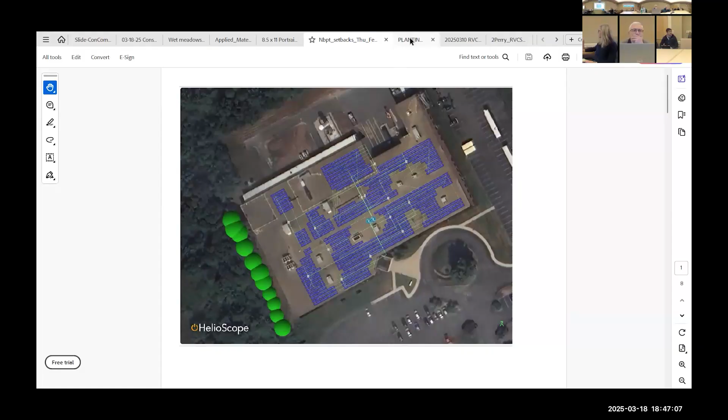Okay, so this is for Stanley Tucker Drive, correct. Then we've got this plan showing the row of trees at the west end of the structure, correct. This is the existing... are these solar panels on the roof? That's our plan, to put solar panels on the roof. Got it, and I've got your planting plan. That's awfully old, from when the building was first built.

So, do you want to walk the commission through what we've got here, or do you need a link to the Zoom so you can share? I think a link would be better. So if you go to the city's website... I'm trying to get there now, I don't know why I can't access it, but cityofnewburyport.com. Okay, I'm there.

Go down to find the city calendar. Conservation Commission calendar, okay, the 18th. Yep, and on our agenda, there should be a Zoom link at the top. So here's our agenda, you can see we're here. It looks different on my homepage. Is it this link right here? It's probably that one. Okay, sorry, it looks different. Okay, I'll go down to... right there. Oh, thank you so much, appreciate that. Now I'll be able to share it from my hard drive.

Let me know when you're ready, I'll stop sharing. Thank you, I'm sorry for the slowness. No worries, I'm usually the one having technical difficulties here.

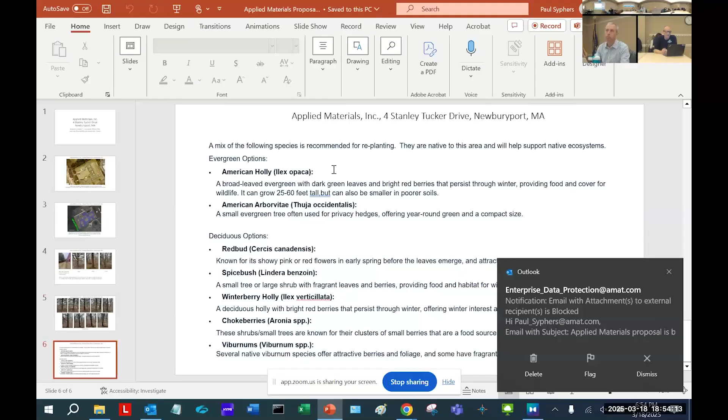For replanting, a mix of species is recommended, native to this area to help support native ecosystems. I have a couple of evergreen options and I really like the deciduous options too. I think I'll mix them up if the board approves. I really like the berries for animals and birds to use those trees as well. That's the end of my presentation.

Could you—I can't really read what they are, if you could read them.

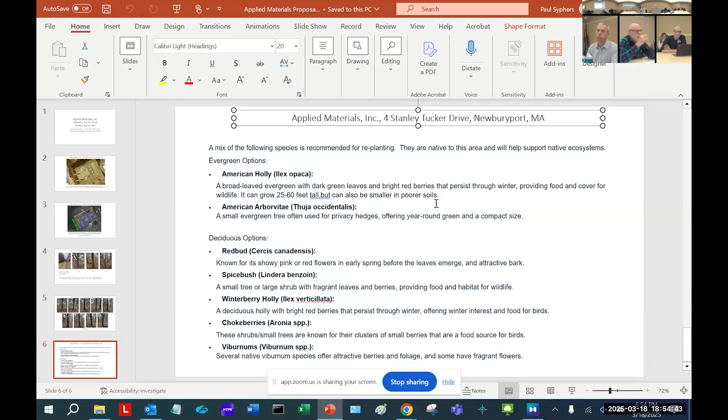Sure, from the top down: evergreen options are American holly, a broadleaf evergreen with dark green leaves and bright red berries, sometimes growing 25 to 60 feet tall—an issue, but if planted on the more northerly edge they won't interfere with solar gain. American arborvitae is a smaller evergreen. For deciduous, there are some good ones with berries for wildlife: redbud, spicebush, winterberry holly, chokeberries, and viburnums.

Sounds good. Any questions?

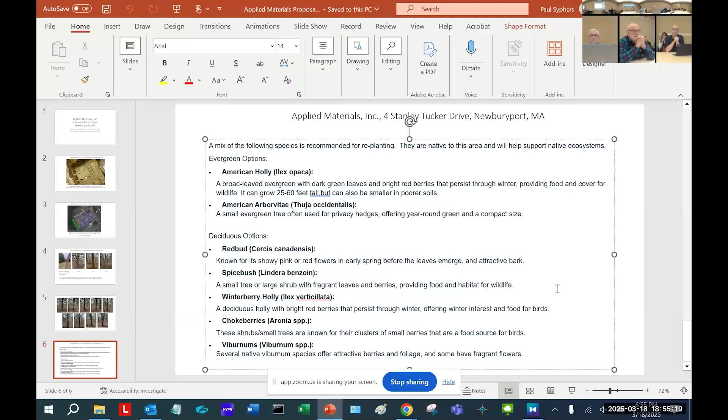How many of those—just one for one, or? One for one, it'll be 12. I'd like to mix them up if you approve—choose one of each and maybe a few of a couple, since I have to put in 12 and there are 7 species, so maybe 2 of each. They're smaller, so I could replace 12 with 14, I wouldn't mind doing that.

No, you can put as many as you want, we're not going to argue about anything. As a matter of fact, at the Gloucester facility where I also work, I'm looking to replace a lot of lawn and sod with wildflowers, so we're in the middle of doing that as well. I'm also on the Varian Green team, so we're very much interested in water and energy conservation.

So the arborvitae is kind of a tall, spindly thing. Yeah, the only reason I put it on there is because it's evergreen and one of the two that are native, and it's a good place for animals and birds to hide. But it's not going to be a wall of arborvitae.

That looks to me not natural enough. Yeah, and as you see, we're right next to a wild stream or brook, so I want to make it look natural over there, close right there.

So you'd be planting these in the same location where you're taking out the trees? Yeah, right within that 35 feet—most are basically 33 to 35 feet, a straight line of pines. I don't know if they were planted or were volunteers. The trees behind them toward the creek are much smaller, mostly blueberry bushes and that type of thing. Since I'm removing trees, I can put in trees.

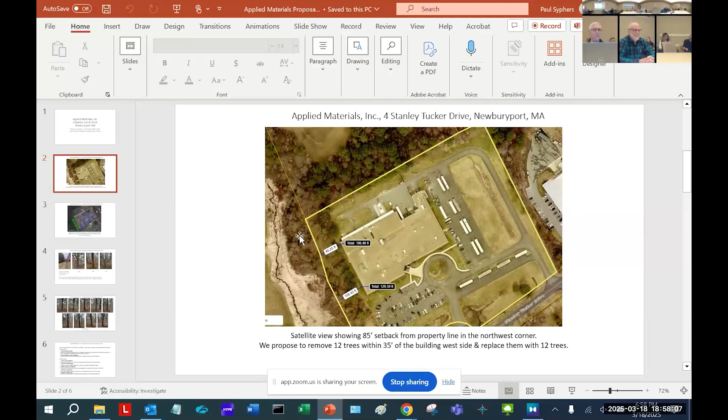Alright, are we good? Maybe 2 or 3. Do we have any conditions for this? Not really, unless you want to specify a certain number to make sure that number gets planted, or specify anything about location or timing of monitoring. We can make it at least 1 to 1, at least 12. The more the better. Knock yourself out, more berries for the birds, the better.

If we're -2, no, the -3 has a condition. Do you want them to be monitored for survival and replaced if they don't survive? Yeah, maybe 3.

And I didn't mention this one beautiful cedar tree at the north end that's within the 35-foot zone, but it's so healthy and so beautiful and it's not going to get in the way of the shade, so I decided to leave that one. Good.

I'll make a motion for a -3 determination, with the condition being we'll monitor it for 2 years to make sure the plants survive. Sure, and if they die, I'll replant.

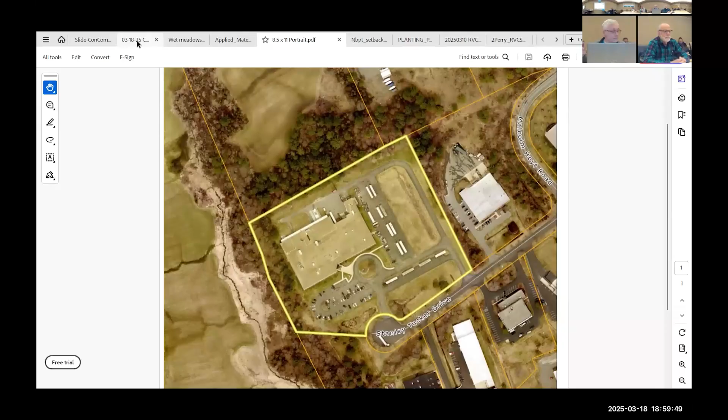Should I hang around or am I free to go? You're all free to go if you want. I'll send you this determination, you'll be able to access it through OpenGov, and I can send you a copy in the mail also if you'd like. Thank you so much, appreciate your efforts, thank you.

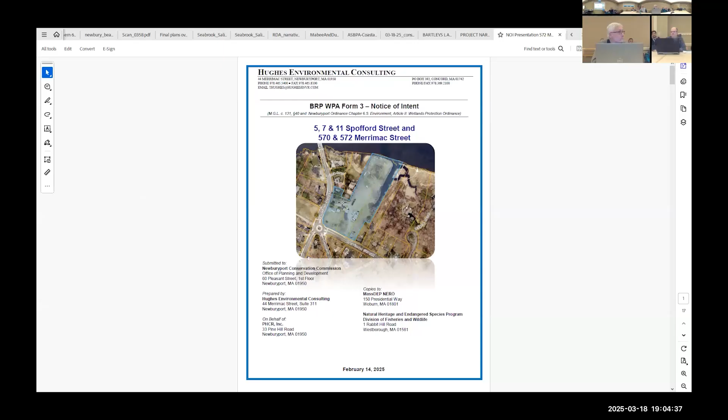All right, so the project's located at 5, 7, and 11 Spofford, as well as 570 and 572 Merrimac Street. So the Spofford lots, there's one here. Can you blow that up? Absolutely, you'll be seeing more detail as we go, but I think this is a good photo to show you. So there's a house on this lot. There is a portion of a house on this lot, and the other portion of the house is on this lot. This lot here, those are the Spofford ones, and this is 570 and this is 572.

And the assessor lines are not far from wrong here. There's a number of structures here and they encroach over property lines.

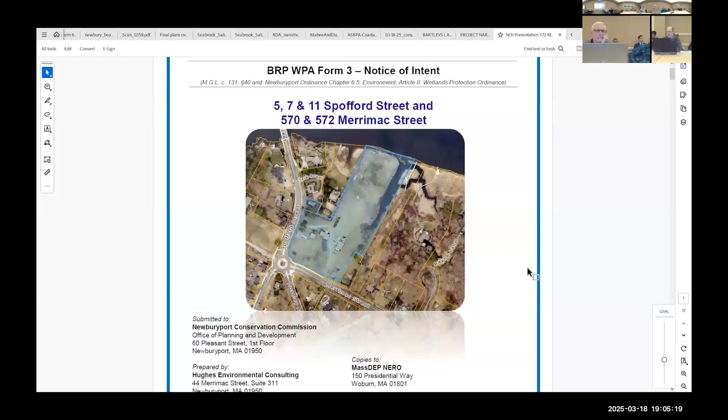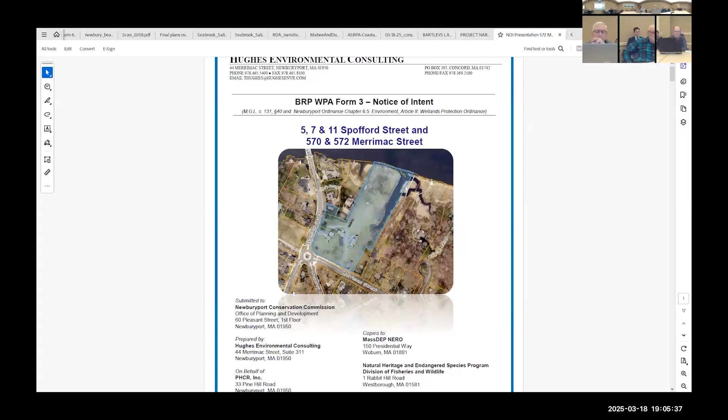So we're starting with 5 lots and the plan is to end with 5 lots. This is, for the purpose of the Wetland Protection Act, a 5 lot residential subdivision, and for the purpose of the planning board, doing an ANR to shift lot lines around, creating 4 lots. Then we're in front of planning to take one of those lots and split it. So it's simpler for you guys, just think of this as a 5 lot subdivision. So much of the work is outside of jurisdiction, but portions of it are within.

For the record, the location is right at the end of Merrimac Street, at the corner with Spofford. I think many of you are familiar with this - if you've ever driven down, look to the right, it's the big piece of property. It looks like it's got a bunch of buildings on it, but no, it's a whole bunch of lawn right down to the river.

So this is the 2023 aerial photograph, it kind of gives you a sense of what's going on. There's a little boathouse down by the river that's been there forever. There's kind of an overgrown crude boat ramp next to that, which appears to be where they launched boats from. There's a carriage path that is there, pretty obvious, sort of very hard packed, with portions of it within the wetland, which has been where they've driven down historically.

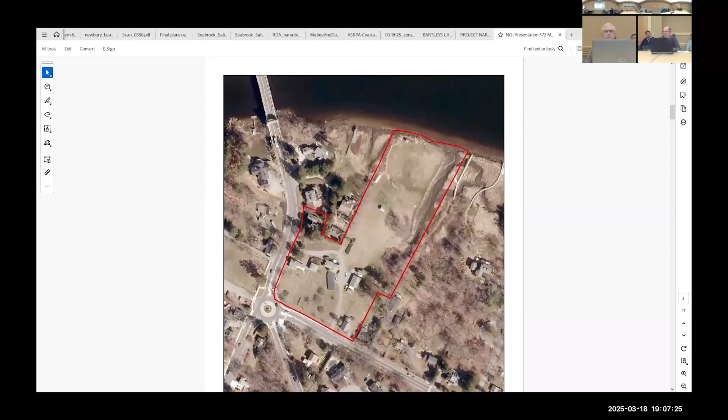And I've got some aerials showing some pretty heavy equipment down there by the river. There's a boathouse, a big shed right here. You've got another shed up on the hill here, a commercial building, a workshop, a big shed here, a single family home, garage, single family home, single family home. As I showed you on that assessor's map, you'll see that these buildings just bear no resemblance to adherence with zoning in relation to lot lines in their current condition.

Endangered species habitat is basically pretty close to where the wetland boundary is down here, and it encompasses the area down by the river and the boathouse.

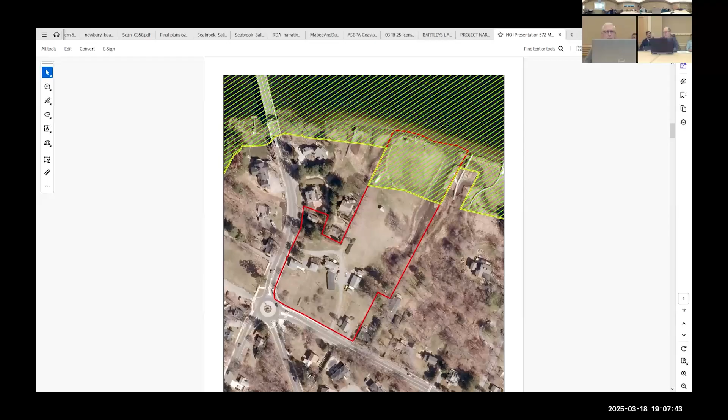So the area is within the AE zone, right where the floodway ends. The elevation is not exactly 9 as shown on the plan, and I'll go through that in a minute.

Can you back up one? What was outlined in orange or red there? Oh, that's a 500-year X zone, or 0.2%. So that's not a jurisdictional floodplain, that's the mapped X, and then everything out of it is the unmapped X. So everybody here lives essentially in an unmapped X zone, at the very least, regardless of your elevation.

You can actually see there's a piece of, it looks like maybe either a boat or a piece of equipment here. I've got some aerials that show cranes. There are some big chunks of granite down by the river. Those are still there, we'll talk about those a little bit.

Then you have this area here that I'm calling the canal, and I'll explain why. A portion of this is man-made that overlaps with a pre-existing stream, and a portion of it is entirely man-made. My understanding is when it was dug out in the sixties, the intent was to put in a dock and have boats come out of here, but I've got no evidence that it ever fully materialized.

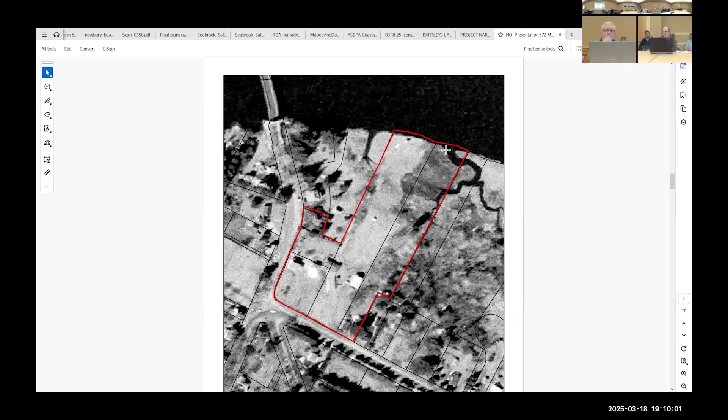If you can see, this is the area where that canal is. Basically, I think it shares the same opening as what used to be a creek. The very next year, in 1966, that's not Mother Nature.

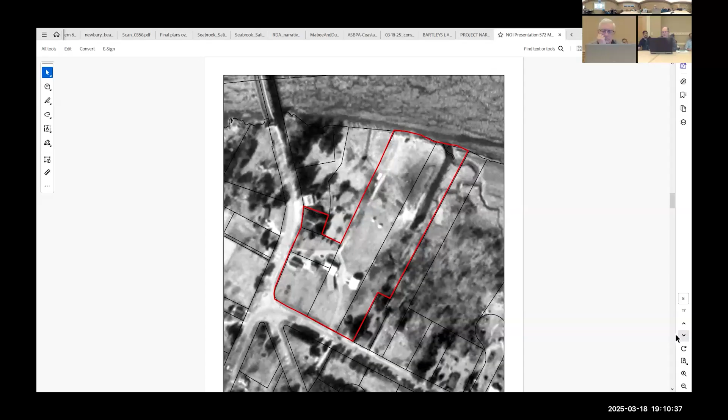You can also see, here's that cart path, here's the boathouse, here's the shed down by the water, here's one of the sheds out in the field. It looks like there are actually two, but there's only one that remains. You can see the building down here, the homes, pretty much almost identical to what exists today. The machine shop's a little bit bigger, but here it is in 1995.

I'll remind you that the Rivers Protection Act went into effect in '96, and I can't remember if the degraded date is '96 or '97. But you can see that everything we're going to claim degraded credit for was in existence prior to the Rivers Protection Act. So when we get into the regulations, this site clearly qualifies for treatment under 310 CMR 10.58(5), which is degraded riverfront.

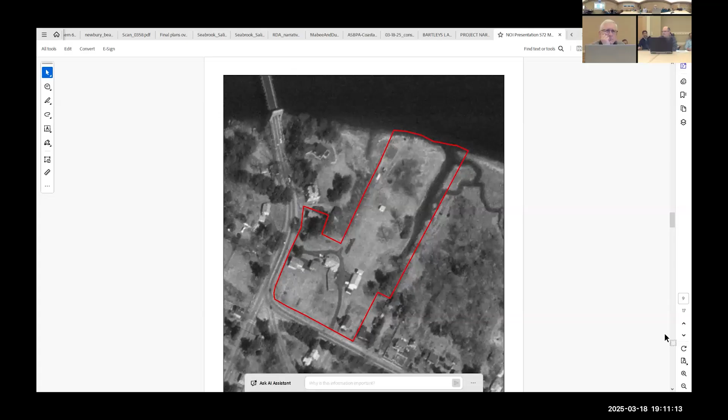Okay, so now let's go to the actual mapped existing conditions and the resource areas. There are a plethora of resource areas present, and to make sure I don't miss any, I'm just going to walk through it. So to start with, the obvious one is riverfront.

The riverfront, because it's the Merrimack River, extends from all portions of the Merrimack River, and that would include at least the natural portions of that canal. There is an argument where we could try to say the canal itself beyond that is not jurisdictional, but when we go through the map, it complies with the riverfront standards, so we figured it's just not worth making a complex regulatory argument. We're just going to call it jurisdictional and go with calling it riverfront.

Because it's tidal, the mean high water off the tidal datum is 3.82, and we draw out our 200 feet off of that. The riverfront jurisdiction, you can see right here in this dash line. It cuts through a shed up here — the garage is entirely in, the shed is entirely in. It cuts down along here, just past the outer corner of this existing home, then goes off site. So basically this whole area is riverfront.

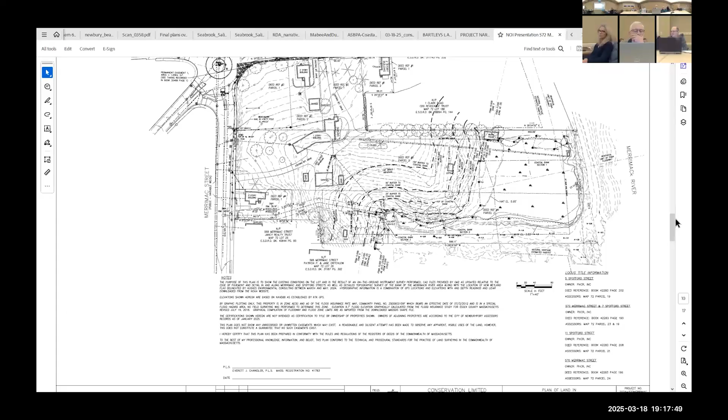But the cart path does run through there. You've got the existing shed, it does have utilities to it, in terms of water and electric. Anyhow, so those are the resource areas. So we have buffer zone to the BVW, we have the BVW, we have the land under the ocean, etc. So we've got a lot of things to go through in terms of addressing performance standards.

So now what we're proposing is essentially to take this and create 5 new lots, and go from some residential and some commercial use to all residential. Right now there are sort of 5 primary buildings and a whole bunch of outbuildings, and we plan on going to 5 residential single-family homes, with an outbuilding that will be at the edge of the field in the upland area that will serve as a communal area for all single-family lots.

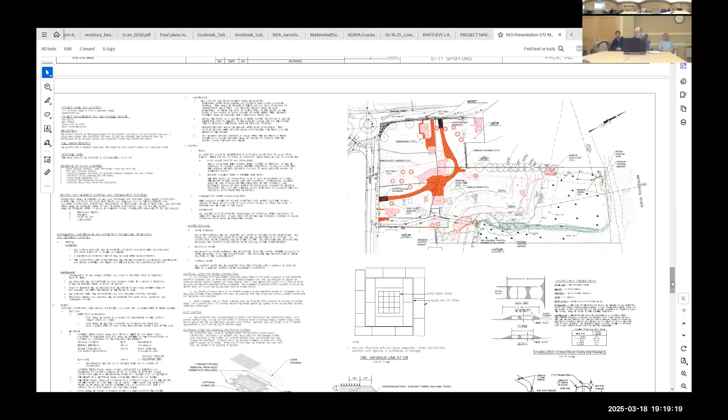And then we also are going to maintain that shed down by the water, put on a through-flow deck and a through-flow walk out to a set of docks that will be shared by each of those single-family home lots. But we basically remove everything, and then we take this shed, which is an older kind of historic shed, and that's going to be relocated rather than totally removed. That will be brought down into this area, and I'll show you on the proposed plans, rehabbed and made into that sort of common area, almost like a clubhouse.

So this shows you what we're doing with that shed, the boathouse gets removed. We take the smaller waterfront shed, the old water access shed, and turn that into a deck. We don't do anything with the cart path except continue to maintain it as it has been historically, so we'll continue to mow it and it will be used to access that area.

But what we will be doing, and I'll show you more detail on the landscape plan, is reverting the wetland back to wetland. We'll maintain an annual mow on that just to prevent it from going through succession, and we will also maintain the ability to control and remove phragmites, because there are phragmites just off site to the west and just off site to the east.

So we all know what would happen if we just let the wetland go on its own—it's just gonna be a phragmites field within a few years. So we'll look to control the phragmites on that.

Is there gonna be a homeowners association responsible for doing all this work after it's finalized? I believe so, and Jeff can talk more about that, since he's handling the planning board side and the legal entity. The one thing we're not doing is creating an open space lot—this will actually be part of one lot. So they have to work out the easements and agreements so they all share the cost and overall management of it.

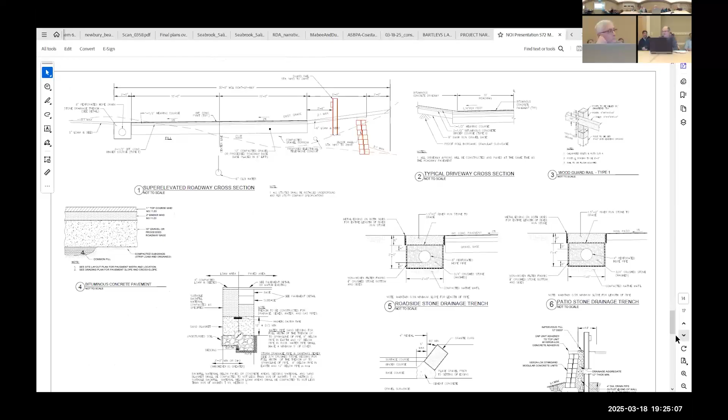So I'm going to skip these details if Steve needs them, we can go back to them. And when I get to the landscape...

There are some elements not shown here first that I want to go over. One is that we are going to do invasive control and native planting wherever these plantings go. There's existing woody vegetation along that coastal bank area, and within it there's some nice natives but also a bunch of invasive shrubs. The idea is we get in there, clean out the invasive woody species, and plant at a density. I've given you a list of native plants in the narrative that will go in that area, and I specify a minimum number of plants we could put in, but basically it's a density-based approach. So when we do the COC, you should be able to go out there and see plants every 8 feet, without big gaps or anything like that.

So this area reverts to wetland. This becomes a wildflower meadow. Then we have the low mow fescue lawn. The inner riparian is running right here. We have native plantings all in here. This area is temporarily regraded, and this area is also temporarily regraded but restored back to more or less its original condition as lawn. But this area, after regrading, does become a meadow, a wildflower pollinator meadow.

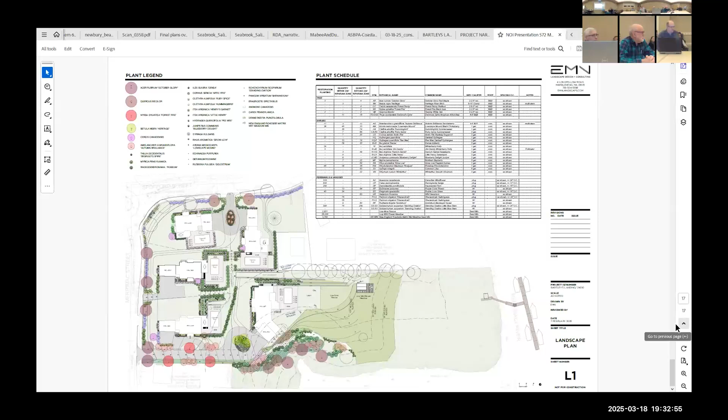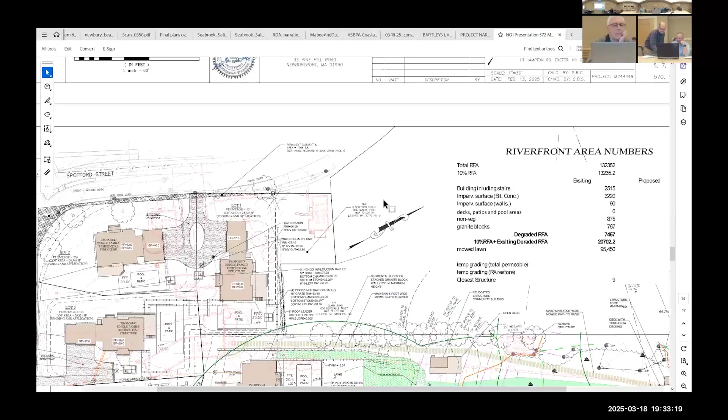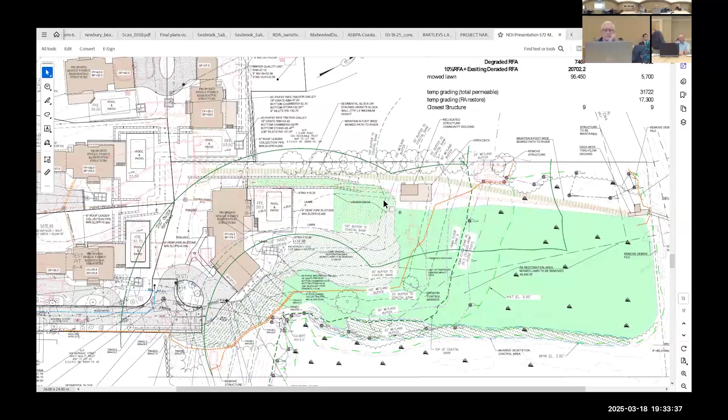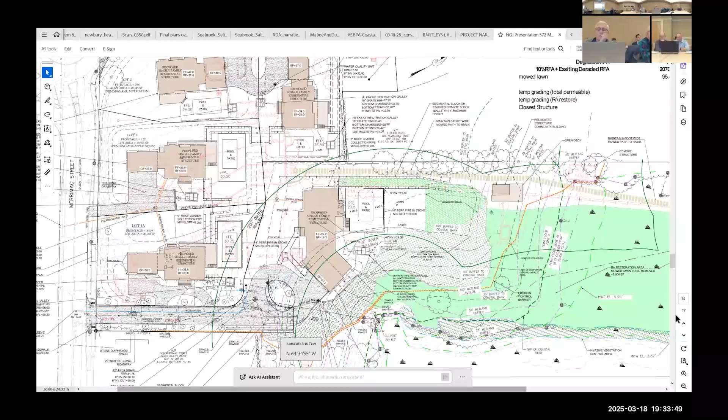Which plan do you want? Can you zoom in this area? Tom, are you or Steve going to talk about the dock? Oh yeah, I'll get to that, sorry. The stormwater part will be quick, then I'll get to the dock.

As Tom mentioned, this project is running through planning board. We've had our first meeting, and as part of that, it's a Courts and Lanes special permit with a definitive subdivision. We're cutting lots 4A and 4B into 2 lots, and with that we needed to create frontage. So we have what's called a private court — a 30-foot wide private way that runs downslope off of Merrimack Street, providing frontage for Lot A and Lot B.

The stormwater for that — we're fully controlling the entire paved area, including the driveway for Lot A, the driveway for Lot B, along with the private court. It's all collected and routed to an underground infiltration chamber system under the road. The road is super elevated, tilted and warped, so all the water flows to one side, where there's a decorative stone infiltration trench that runs along the road, picking up probably 70% of it.

The turnaround area at the bottom of the hill has two small catch basins. This edge is curbed to prevent water from flowing down the fill slope, which is fairly large at the end of the driveway and road there. The stormwater collected in either the infiltration trench or the catch basins passes through a water quality treatment unit, since we need 44% TSS removal prior to infiltration. We're providing two large concrete chambers underneath the road where the stormwater is directed, meeting both our recharge volume and water quality volume requirements.

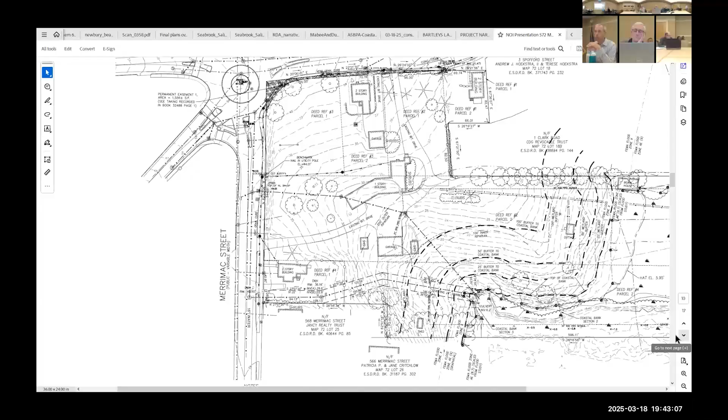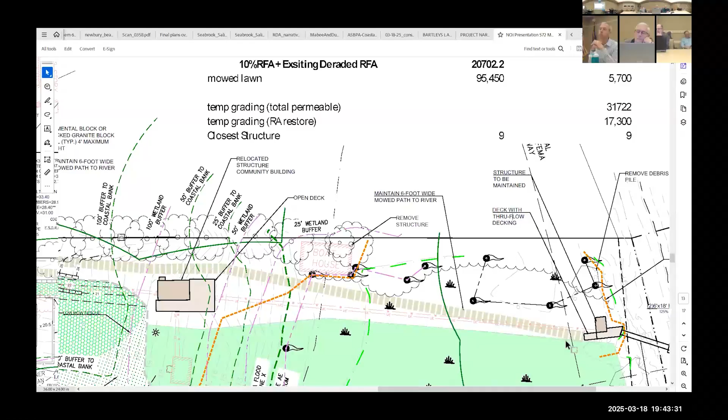So the plan is to continue to use that cart path, right? And where the cart path approaches the shed, we basically get people up onto an elevated walkway with through-flow decking. We keep that at the same elevation to essentially blend with the existing shed elevation, the floor elevation, so you go in. So you can actually still go into that structure.

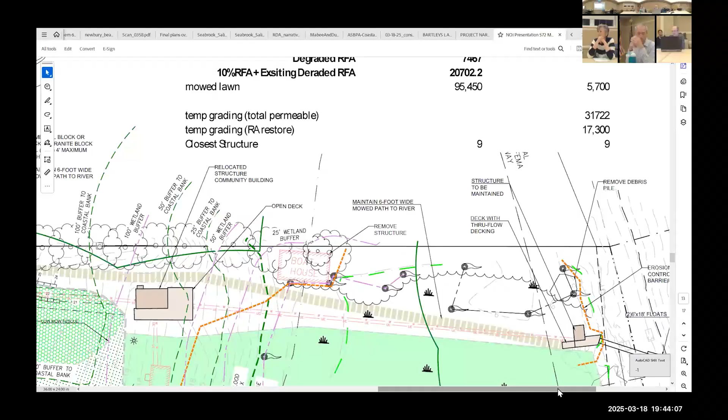And then this will be supported with helical piles, and then there'll be a seasonal ramp. The seasonal ramp gets you down to a float setup.

And what we show here is a habitat mooring block. So a habitat mooring block is kind of a trapezoidal mooring block, and I think I have a detail in here I can pull up, but it has holes bored in it. They were developed up in Maine. I've used them elsewhere in the Merrimack River, and if you can't use helix anchors, then this is kind of the next best thing. They provide some habitat, they have nooks and crannies for fish to go into.

We are going to try to use helical anchors, but if we cannot use them, then the habitat block is next. So we've basically done our impact analysis based on the habitat blocks as opposed to the helix, and we show it because just from my experience boating anywhere near that bridge that's not too far upstream, the river can really flow quite a bit there, and the sediment is likely too coarse to get the helix in. So let's just assume it's going to be habitat block.

And then it's nylon strands attached to a short chain. It essentially acts the same as an elastic rope, it has basically the same idea of flexibility, it doesn't bang on the substrate. And the idea is we've got one long parallel float because we don't want to get out too far into the channel. Everything should be floating at low tide, so we shouldn't have any issues with needing feet or sleds on the floats here.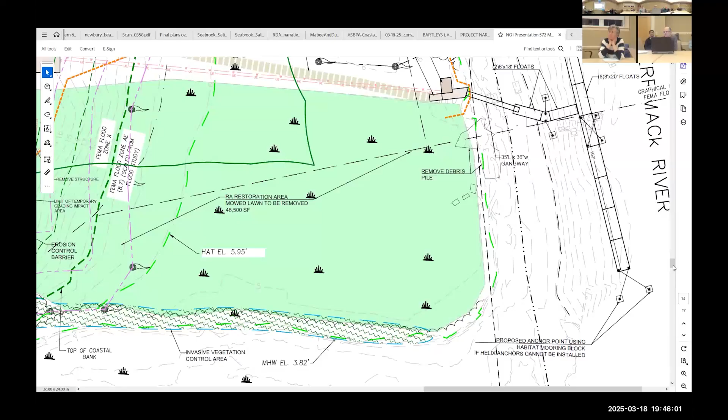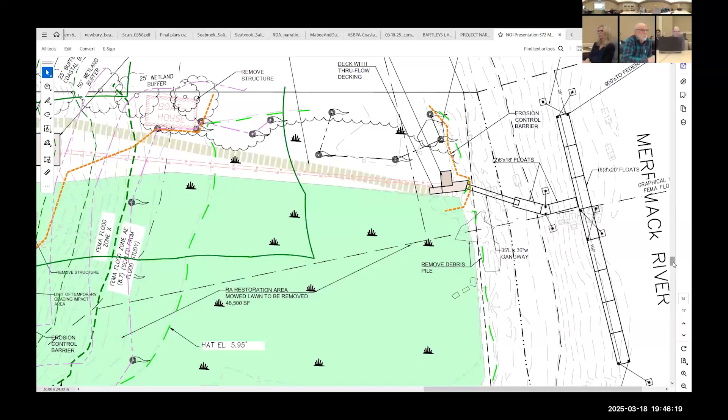And have you talked to the Harbor Master about this? Need a water sheet for that? It will need approval from them, and we intend on pursuing Chapter 91 approval as well. However, this would be permissible under a 10A on an annual basis, but obviously long-term it's far more security under a Chapter 91. It will also need Army Corps.

And where will these go in the winter? Any idea, on site somewhere? Yeah, out of the wetland. Obviously either off-site for storage, and we can talk more about that, whether you have any desire to store them on site somewhere, or whether you want to just get them taken off, or do you know the answer there? I think it's probably just ease of, you know, whatever works easiest.

You know, I think at first we were thinking maybe where the beaten path is, like to the west of that might be.

If we got outside the wetland, that's fine, but if you're in the wetland, that poses a problem for storing. Up from there would be the only logical place. Other than that, they'd be hauled off. 99% of people nowadays will have somebody else haul it, bring it to a boat ramp and store it there. We'll come up with a firm answer on that. It's hard to haul over that bank, and we'd need a piece of equipment to do it down there too, so it would most likely be hauled off.

I did see in one of the older pictometry photos a crane sitting down by the river, which makes it odd that I couldn't find evidence of a former dock there. They had everything set up as if there was a dock, but it looks like they just used it for a boat ramp.

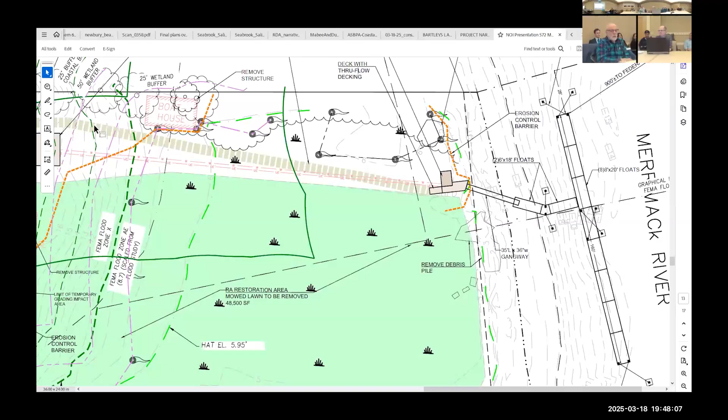I think we would prefer it to go off site. Fine with me. We do have areas within the site that are non-jurisdictional as well, so we'll look at that and come back with a firm answer, but it probably is going to be offsite.

To me it's a pretty straightforward analysis of a lot of different regs. It looks like we meet the regs, and I think the overall impact of the project really is no adverse effect, it's really a beneficial effect. Everything from getting rid of old commercial buildings and old homes and putting in newer, more modern construction. What was the commercial building?

What kind was it? A machine shop. Any concerns about contamination? We already had testing, that was one of the first things done. No leaking barrels, nothing.

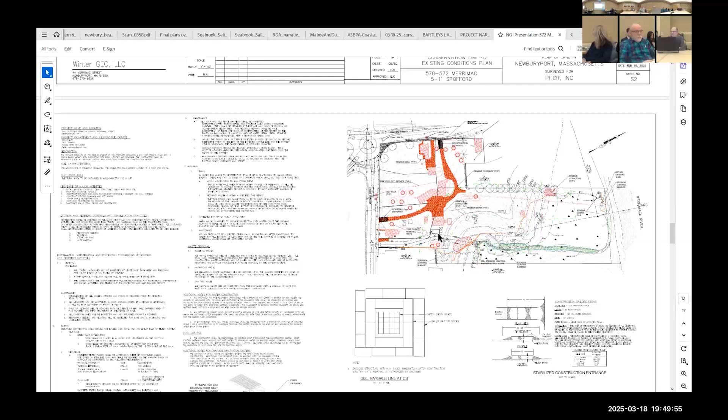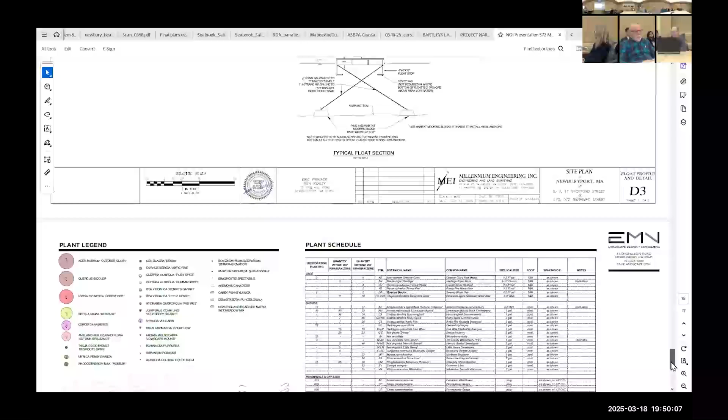The thing is, machine shops handling metals and that kind of stuff with no stormwater controls is clearly an improvement going over to a less impactful residential development that brings stormwater controls, adding pollinator meadows, low mow areas, and letting the wetland revert, along with invasive control. We can go through the landscape plan in more detail if you want, but I think it's obvious from the graphic. We paid a lot of attention toward the river from the development, really trying to beef up the planting in the areas we're regrading to make that court area work, blending down into the existing woody vegetation, expanding it, and taking care of the invasives within it will have a real dramatic improvement, I think.

Are all the plants that are outside our jurisdiction natives also? Trees and... I don't know that they're all native, but there's nothing problematic. They're all native except for the lilacs at the street edge, that's the one non-native.

There aren't any native lilacs? No, no, you would think there would be. They've been around forever, they feel native. You see them everywhere, they're historic, but they're actually not native. But that's the only one, everything else is native. I suspect they've been around 100 years or more, which would make you think they're native. They have the right of citizenship, yeah.

So Tom, about the plantings down where the outfall pipe is, is there good soil there for planting now, or will you have to add soil? I don't think there's any need for soil amendment except the typical over-dig for bigger plants. You typically dig 2 to 3 times the diameter of the root ball or pot and add in some decent soil and fertilizer, but I don't see anything crazy.

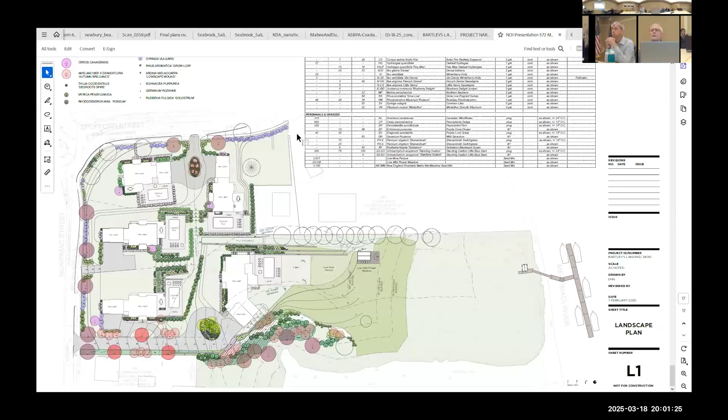We had our first meeting and it went very well. The planning board seemed very receptive to our presentation. We did get some peer review comments from Phil Christensen, which we're responding to now. I think after tonight's meeting there'll be an updated package for the planning board, and I'm hopeful we'd be closing at the next one, though they'll have to work through the homeowners agreements and such. Maybe Jeff, you might want to weigh in on the planning board process briefly.

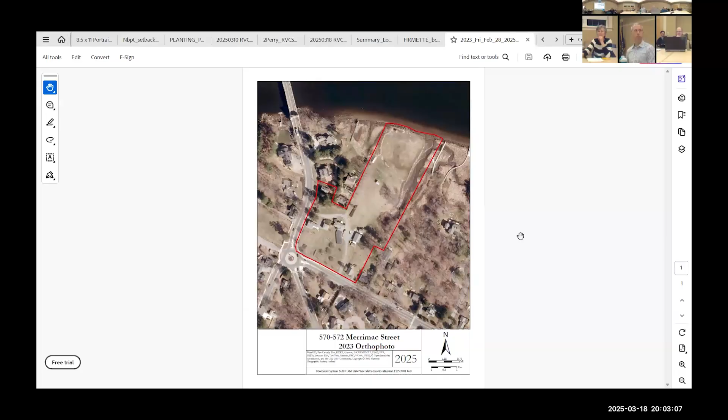I do want to clarify, the planning board process isn't focused on the driveway locations other than the proposed court. The other ones you're referring to would be one additional driveway for lot 3, and then one shared off of Spofford, right Steve? I don't have the overall plan in front of me. There's one on Spofford. Yeah, just one shared off of Spofford.

So I just want to be clear, the planning board's not actually reviewing all of the proposed driveway locations. It sounds like there are two you're asking about that aren't part of that review. Those will be reviewed as part of the ANR process, the approval-not-required process, maybe, although that really relates to lot configuration, not lot build-out. So generally it's going to come up in the context of building applications. I will say the planning office has seen this plan, or some version of it with the same driveways located on it, and they haven't indicated any problems with what we're depicting there.

Actually, the contrary, they're very happy. Yeah, that's good. We're combining the two on Spofford into one to reduce the traffic. Oh, there's two.

Is that the house? Yeah, there's the house, don't remember. The one that's coming down. Oh, where? Yeah, the one up to the right. Oh, so it's actually better.

If you can see right where the new combined driveway comes in, that's pretty much in alignment with where there's currently a loop drive that goes through the whole place. That's right, it comes in.

I think from that point of view, while it's not a conservation issue, I think it is an improvement. I was just curious, since you drive down that road a lot. I mean, outside of wetland issues, I think it improves the area, and with wetland issues too, obviously we've got to work out some details with you guys on how we maximize that to the extent we can. But I think it's a good project.

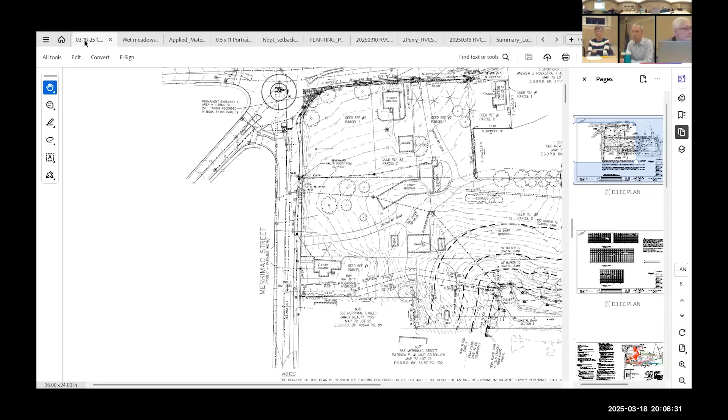Thank you. Thank you. Thank you. All right.

Next item, River Valley Charter School, Perry Way, notice of intent. Thank you, sir.

Ryan, if you'd only been here five minutes earlier, you wouldn't have. Right, oh no, it's more like 30 seconds. Put it all in one that way.

Thanks for waiting, Beth. Thank you.

I'm going to my team, I'm going to have a presentation. Oh, okay, great, Emily. Let me move Emily over to the panelist. Back. Hi, Emily.

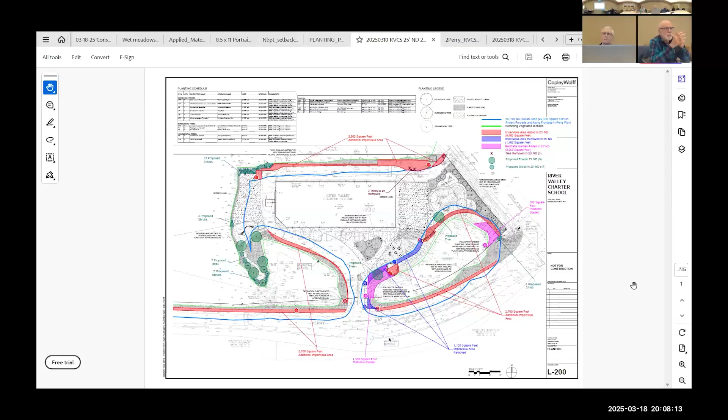Hello, good evening. Great, you can hear us? Yes, I can hear you. Can you hear me? Yep, yep. Do you want to share your screen? Yes, please. All right.

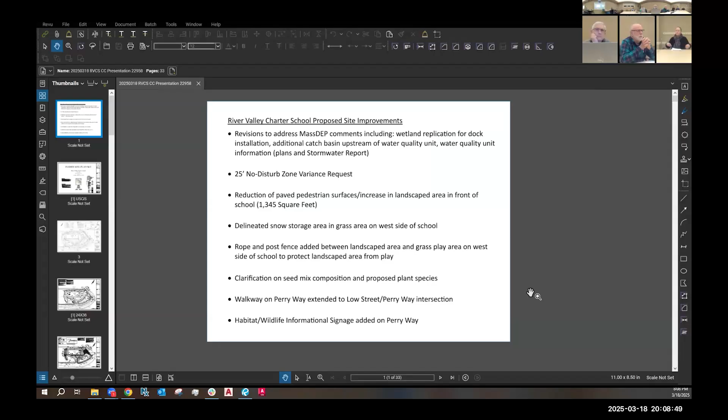Let me know if you can see the screen. Yeah. All right, great. Katie, do you want to run through these or would you like me to run through this part? Brendan and I can kind of go through them and maybe jump in as needed. Okay, great. Can you blow it up a little? Of course. Is that better? Yeah, yeah.

So if there's any parts of our original presentation you want us to touch on again, we can, but we thought we should go through updates to the plan and design that we did since we first met, if that's all right with you. So we kind of broke them out here.

The first one is we revised the plans to respond to the comments we received from DEP. That includes a small area of wetland replication for the dock that is proposed, an additional catch basin upstream of the water quality unit because they didn't like the grate we proposed on one of the water quality units, and then providing more information on the two water quality units that are proposed. So nothing too exciting there.

I think we've talked a bit about the variance request for work within the 25-foot no-disturb zone. Ryan, I don't know if you want to talk about that one a little bit.

Sure. So ordinarily, the regulations don't permit work within the 25 no-disturb zone, as the name suggests. But the ordinance also provides that the commission may grant variances from the regulations upon finding that no reasonable conditions or alternatives that would allow the project to proceed in compliance with these regulations exist, that mitigating measures are proposed that will allow the project to be conditioned so as to contribute to the protection of the wetland values, and that the project is necessary to accommodate an overriding public interest.

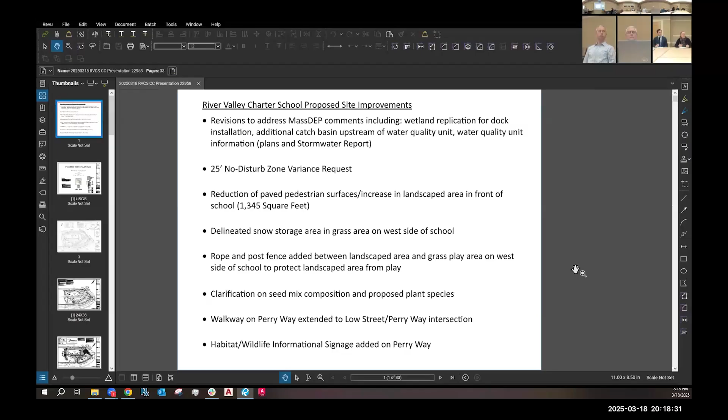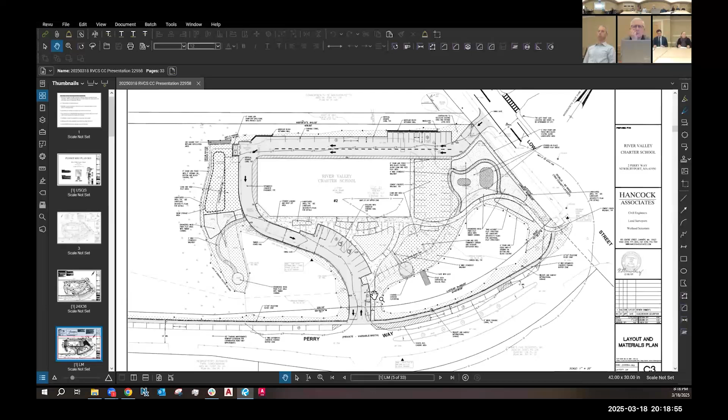So I think we had talked a little bit about why aren't we proposing permeable pavement also for some of the walkways. So what we did is we took another look. Emily, if you want to go to one of the proposed site plans, at the concrete walkways in front of the school - pretty much we narrowed all of them. They were wider in some portions, and we were able to reduce that pavement by about 1,300 square feet. That puts us at a net of just over 5,000 square feet of pavement reduction on the site.

Gardens get bigger? Yes, they did. Yeah, and Emily can describe this a little bit - I think you actually added in some more, I don't know how you would describe it, it's not all lawn and manicured, right?

Yeah, I can flip to the planting plan. We actually broke this into two pages - one has the trees and shrubs, and this has the different seed mixes. We did propose significantly more of the pollinator mix, so that's this dashed hatch. It would be in this front planter near the outdoor classroom space, also on this side of the wetland, just as a very welcoming entrance - having a little bit of color within these native seed mixes.

While we're on this - so in that pond, the first pond, that's Low Street and Perry Way, no, the other one - that one, I didn't notice any phragmites in there. But the other pond had a lot of it. I'd like to see that go away.

I know, and it's not a one-time thing, it's a forever thing. Yeah, and this is a discussion that our team has had multiple times. Part of it was recognizing that the school has limited resources and is responsible for funding the grounds and the building themselves. It just felt like, where these ponds and wetlands are interconnected to many other properties that are full of phragmites - not that it's impossible, but it would be very expensive over years and perhaps difficult to keep them from coming back in.

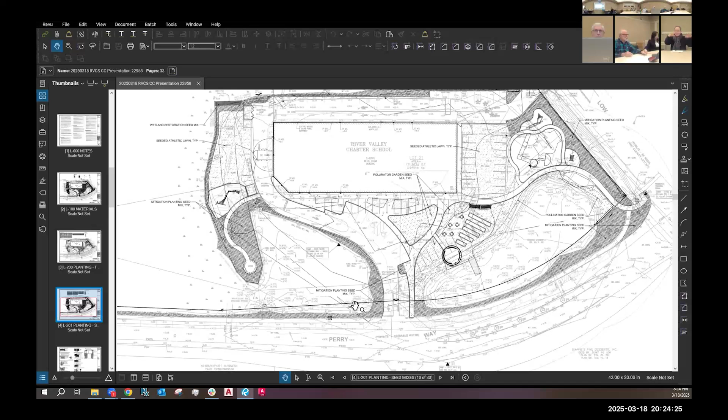Does it fill up mostly from groundwater? Yeah, there's standing water in there all the time. But of course it also receives stormwater runoff, groundwater from the road or from the property, or from the upgradient property. There's a very big watershed that drains down to this little river, including the Nock Middle campus and Johnson Street and portions of Perry Way, and uphill from the Nock Middle school.

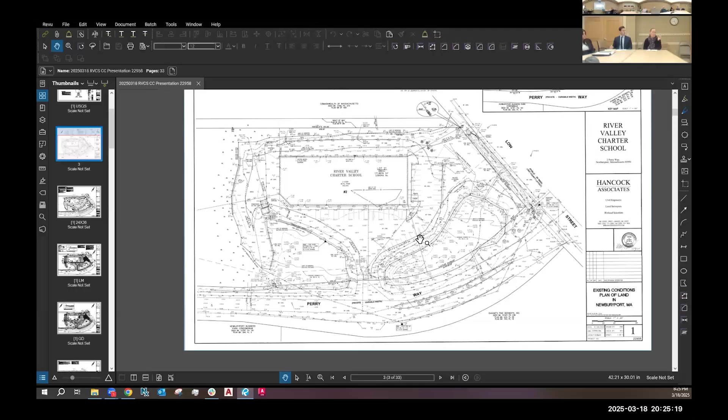And through the culvert, and then through the bordering connections, it connects back to all the wetlands behind the property, and all the wetlands in the rest of the property, and then those behind that, and the rest of the industrial park too. And this pond on the left, we call it a pond, but of course they're both replicated wetlands, and that one is really connected to acres of wetland beyond that.

I'm not saying I like phragmites either, but I don't think the school does either. I think we need to be mindful of their yearly budget. Have the kids go out there and pull it.

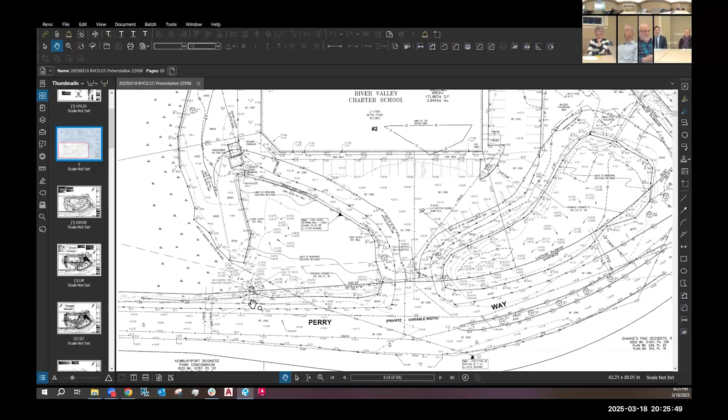Yeah, I think these are things we can learn too. Well, I think once you go through the initial expense of the first year, I don't think it's that much on an annual basis, in theory. It's not going to come back. I mean, some of it will, but I'm not an expert.

I don't see how - I think it absolutely would come back, everywhere. It's one of those things that's really hard to get rid of unless you either excavate it all out, which is a massive amount of impact, or use the glyphosate year after year for several years and still see them continue to come in. So it's a long-term management situation, for sure.

I think it would need to be in perpetuity, just because of all the phragmites nearby. I guess, you have open water, so it's never going to get in there as long as you keep the ponds themselves open. It's the edges that are the problem - it creeps in, and keeps dumping mats of itself.

It'll eventually remove the pool. As long as they maintain the pond bottom elevation, and make sure it's not getting filled in with debris and sediment where phragmites is, but as long as you have open water, I think the phragmites is not going to take over. I don't know, it looked to me like it was growing in open water - well, maybe it used to be. Really, it'll drown.

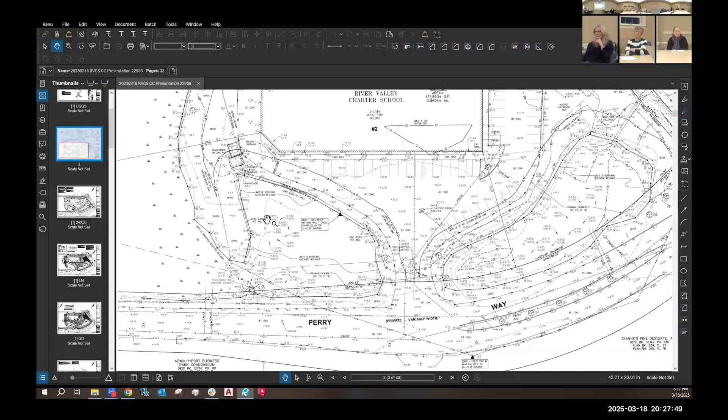It doesn't like fully inundated conditions, it will go intermittent. Something to look at - maybe you could talk to your wetland scientist. I can only play wetland scientist so much, but yeah. Well, I mean, I know you guys know what you're doing, but I guess someone who's done phragmites restoration, or phragmites removal - not restoration.

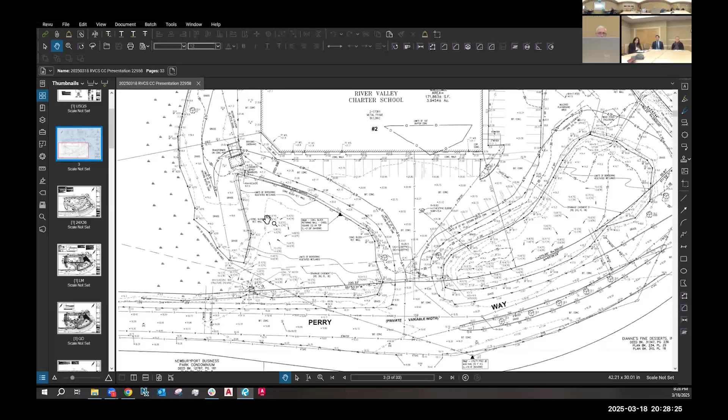I would reference that comment that Ryan mentioned, from the analyst at MassDEP, who specifically said that she didn't support the removal. So as I've mentioned before, my biggest concern with the variance is the parking spots at the north that will totally abut the wetland.

I have big heartburn with that. I honestly don't see the need to go into there. The fact is you could build something, utilize part of the stuff that's already paved over further south, and turn those into parallel spots, get them away from the wetland. Just move the fence down.

Below the right arrows there, where they're parking now. The rest of the intrusion I don't really have a big issue with, especially further south - it's concrete block walls keeping all that down there, so going into that doesn't really mean a lot. But you want to go and directly abut the wetland for parking, and that's kind of a red line for me.

And I know there should be enough room to get most of those spots, some parallel and then some to the south there, but they need to keep that for fire lane. I'm talking about the very top up there, on the north side of the building.

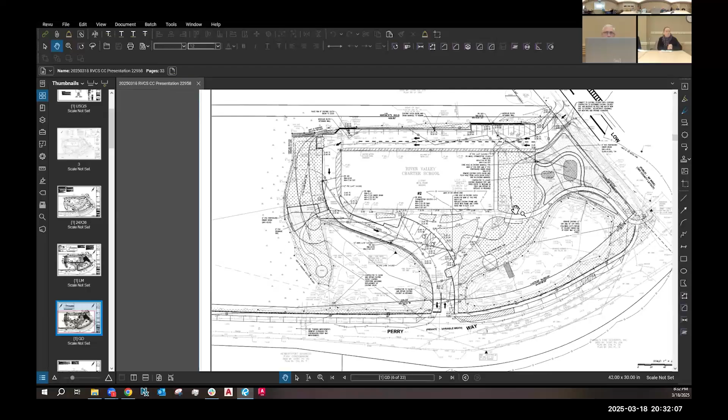And at the rear of the school, it's in the shadow during the day. Most of the months schools are in session it's cold, and that area in the back is not usable for educational or play purposes. That area to the right of the school, where we're taking out a parking lot and putting in grass, that is a comfortable place. So that's kind of where we ended up with this layout.

Those parking spaces, the ones that are head-in there, they're already compact. A typical parking space is 18 feet long. Those are shown as 16 feet, which is about as short as we can go to be usable.

I understand that you don't like the idea of vehicular pavement so close to the wetland. This pavement would be sloped away from the wetland, with a curb along the edge, going to a new catch basin with a deep sump and a hood and water quality treatment unit. So I really don't expect there would be any runoff from the pavement back there that would get into the wetland.

I know we're really close there. There's a short Versalock retaining wall, which I think we've all seen - those are small blocks that can be installed by hand. We would leave a silt fence in place during installation, so there would be erosion control at all times, and we would make sure the area was stabilized as soon as possible after that was put in. So we're really trying to be mindful of the wetland, which I know back there is pretty much all phragmites.

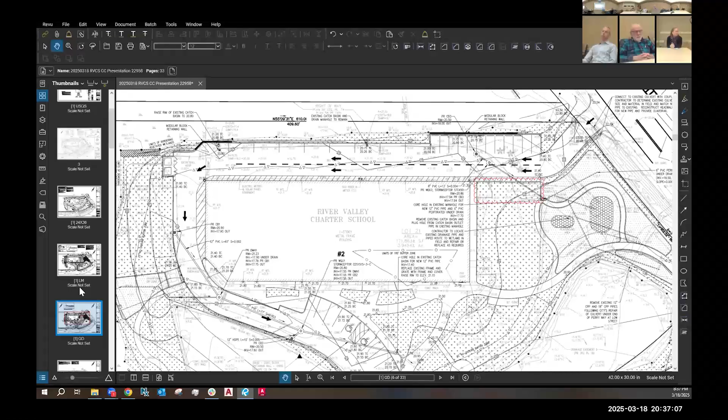If you made those perpendicular spaces parallel, how many could you get, maybe 4 parking places in there? Maybe 5? Ellie, could you go back to the plan that has the parking counts on it? I think the destination is probably 4.

The other direction, Ellen, sorry. The one right after that. There we go. So we had 12 8-foot wide spaces there. 12 times 8 is 96. 96 divided by 22 would be 4. So we'd be going from 12 spaces to 4 spaces.

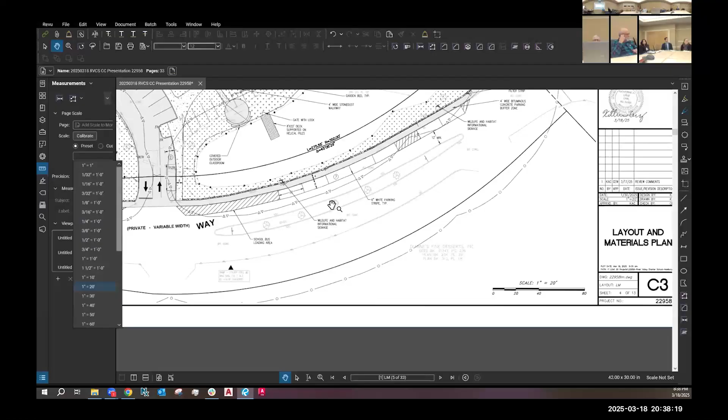Okay, and if across the street there in the field, instead of putting perpendicular spaces in, could you put 2 or 3 parallel there? You're using Bluebeam, right? Could you measure that length of grass? Scale... well, that would be 7 spaces where you had 12 before. So you'd be losing 5.

Is that a problem? It does because it would affect the total amount of spots we're proposing, and we would have to update our request before zoning. Even though it is a Dover exempt use, this would be a significant enough change that we would have to reevaluate the number of spaces on site. I believe it would still be a net positive, but we would still have to re-ask based on the new number of parking spaces.

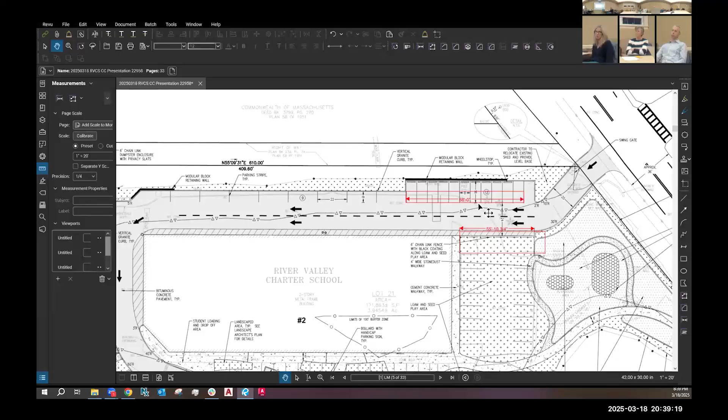What about the idea of just adding some additional mitigation or wetland replication area, as mitigation for those spaces rather than moving them? Is there any way to make that replication area larger? I don't think we could fit it in 1-to-1, because we'd lose the area, but we could maybe extend it to the back of the dumpsters, though that may not be a lot of space. I'm just trying to think of a way that would make up for that impact for the commission.

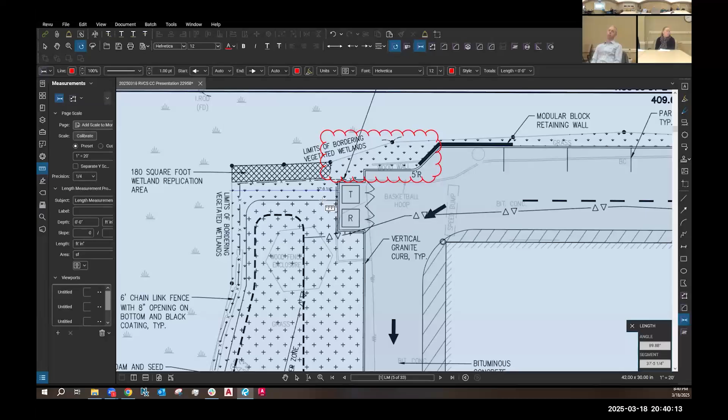I think if we were to extend that wetland replication, Emily, you'd extend it the length of the dumpsters behind them, so the wetland replication got deeper.

I don't know if that would work for the commissioners, I'm just throwing it out there as a potential option. I guess I don't have a huge problem with the parking as it is, because I know there's a wetland right there that we're abutting against, but it's all phragmites, which has little or no wetland value. So if you expanded the mitigation area, I'd be fine with it. I don't know, Joe, I don't know. No, I want to see what's going to get proposed.

That's my two cents. No, I think you bring up a good point, and the question is, I don't know if you have an accurate estimate based on what you've drawn, but what do you have for a net loss of spaces if you were to adjust that plan accordingly?

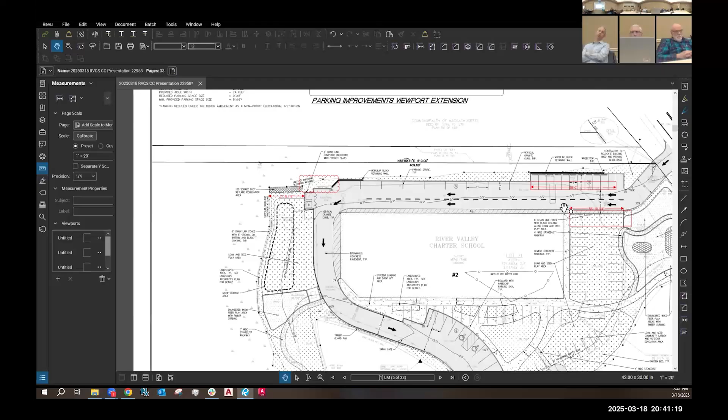So I think, sorry Katie, I can just chime in. We could get about 4 more parallel spaces here. And then if we wanted to do all 8, you can see it really doesn't fit on this side. So I think we would lose at least 1 space.

It seems to me like losing 1 space is a pretty reasonable compromise to get out. I mean, it's not only disturbance in the 25-foot zone, but it's a permanent disturbance with vehicles parked there. It's probably the least ideal scenario.

Well, I think right now there's a lot of pavement on this site that's used by cars that just drains directly into the wetland with no mitigation. No doubt about it, this is an improvement for sure, and we're eliminating all of that. All of that pavement is going to be treated.

And I think, you know, this is meant to be a sports field. I know it's not regulation depth, but making it smaller, it's just not as usable. Which I think would be a shame for the school, trying to fit in the most that they can there.

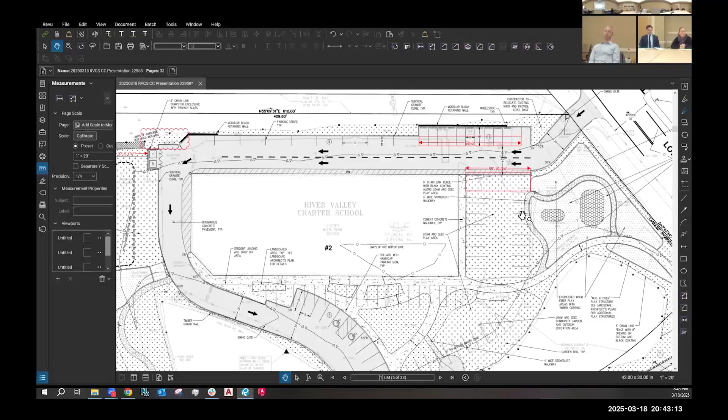Hear your concerns. Another concern that I have with those spaces in particular is it - I would be surprised if a plowing company didn't start pushing snow right off of the edge. Along the side they're gonna go straight down and bring it around the driveway, but the temptation for someone coming in at 3 o'clock in the morning, getting that cleared out, that concerns me too. The snow is going to be pushed over there.

Snow that's been sitting on oil soaked pavement. We're doing this to get rid of the Phragmites though. This is our removal plan, yes.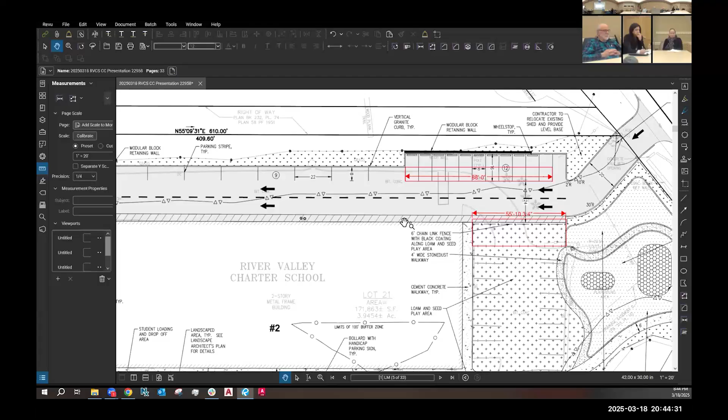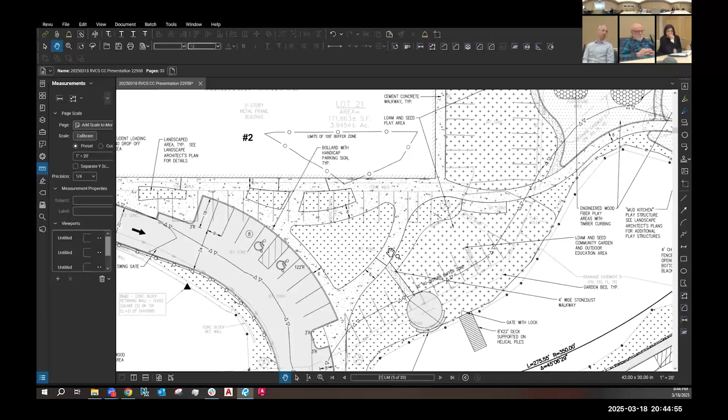Could we maybe go through the rest of our revisions? Oh yeah sure, I had another question before we move on. The areas that you increased in size as a result of reducing the width of those pathways, where you have the pollinator seed mix - are you planning to cordon that off in any way that prevents... it seems like every square inch of non-paved surface out there is trampled to where nothing grows.

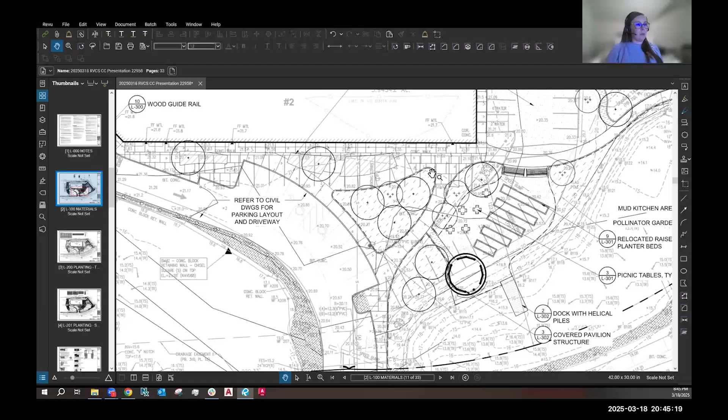Emily, you want to show them? Let me flip through the landscape plan and then I'll show a detail as well. So we heard from the site walk that having a low plant protection barrier would be beneficial. So we proposed a wood post and rope barrier along these planted areas with the pollinator habitat, and then again along the edge over here that's planted with a different seed mix.

The perimeter would still have a chain link fence, just to help especially with ball control, but it would have a 6-inch minimum gap below it to allow for wildlife to pass through. We didn't want to create a situation of having 2 chain link fences that often traps trash and other debris. We thought the wood post and rope plant barrier would be helpful as a visual cue to alert students to slow down, not go in there, and still fit with the look of the school. I can show the detail as well.

So we've added this rope rail detail in, so it would have a 6-inch by 6-inch post with holes, and then a natural fiber rope strung between each post. It does need a little bit of sag because the rope itself can collect moisture, different thermal conditions - it can shrink and expand a little bit. So having some give within there is helpful.

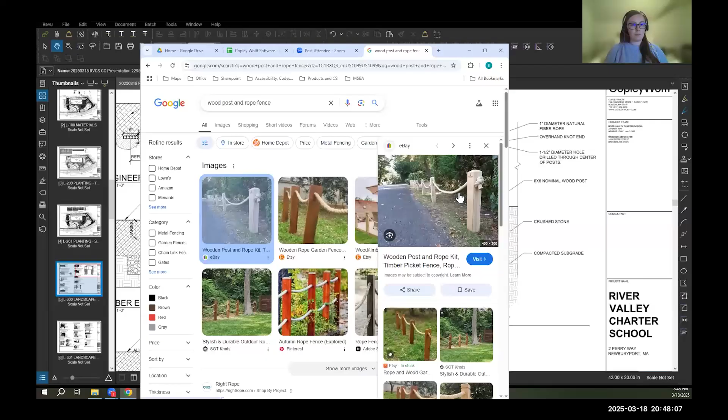Yeah, that was good. Thank you, Emily. You're welcome. I think that's a great solution, so. I don't mean to interrupt you, go ahead.

No, Emily, do you want to go back to our list at the beginning? Yep, page 1.

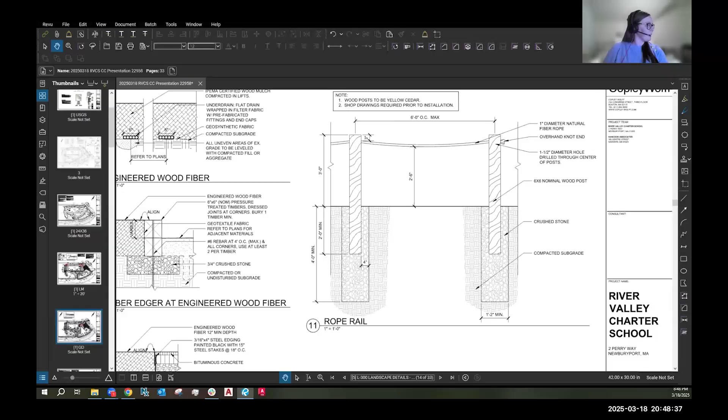Okay. We delineated the snow storage area that we talked about in the grass on the west side of the school. We just talked about the rope and post fence. I know, Steve, you had some questions about what's in the seed mix and the proposed plant species, so Emily can describe those.

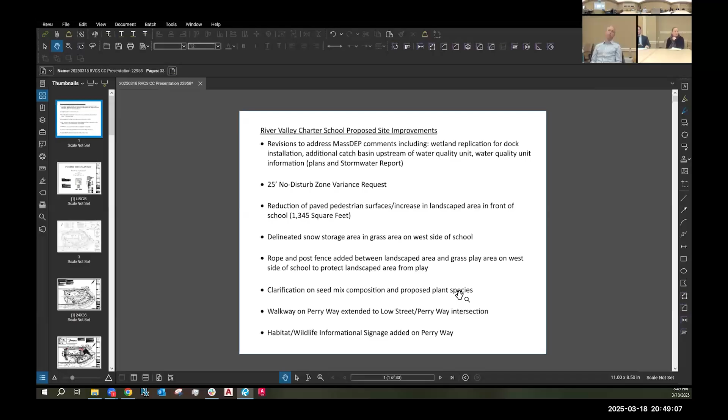Let me jump again to the planting sheet we added. So we clarified the seed mixes. We now have 3 native seed mixes. We're also just showing the athletic lawn area that would be a mix of fescue and Kentucky bluegrass. But these 3 seed mixes would all be native mixes.

So we divided them into a mitigation planting seed mix, a pollinator garden seed mix, and the wetland restoration seed mix. As I mentioned before, the pollinator garden is primarily located near the outdoor learning and the school entrance, really to include a few of those brightly colored native plants for visual interest, but also for pollinators, and that wraps around this side of the wetland.

The mitigation planting would be the primary seed mix along all the perimeter of the site and along these driveway areas. We do have it over in this outdoor learning area just so students would have a different experience between the 2 different spaces and along this perimeter. And then this back corner is where we have the wetland restoration seed mix. As Katie had mentioned before, that was accounting for the size of the pier in this wetland.

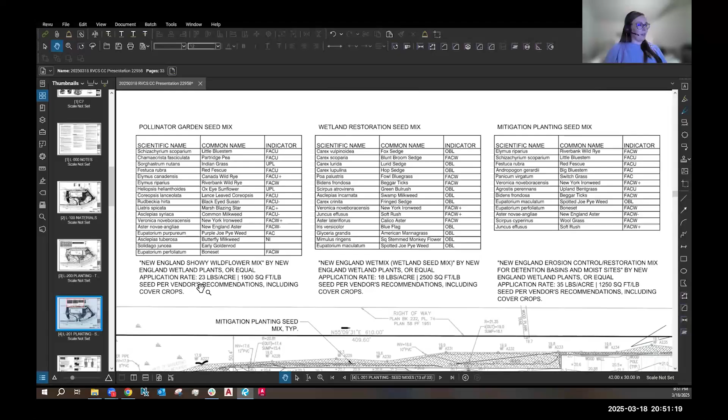And then we also included notes for the contractor on the application rate, and that they need to be following the vendor's recommendation, including cover crops, just for the seeds to take. So those are the 3 different mixes that we're proposing.

Has that been uploaded to the city's website? Yes. Okay, I guess I didn't know if they did that. Yeah, a bunch of new documents were uploaded today. Okay, I'll take a look at it and maybe comment. Great, yeah, we'd welcome any comments or suggestions on these.

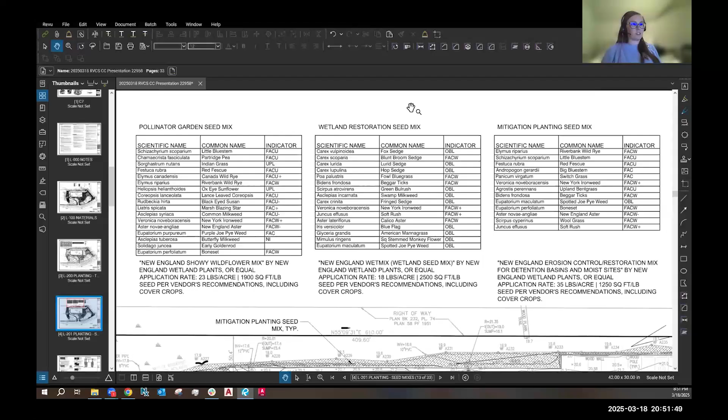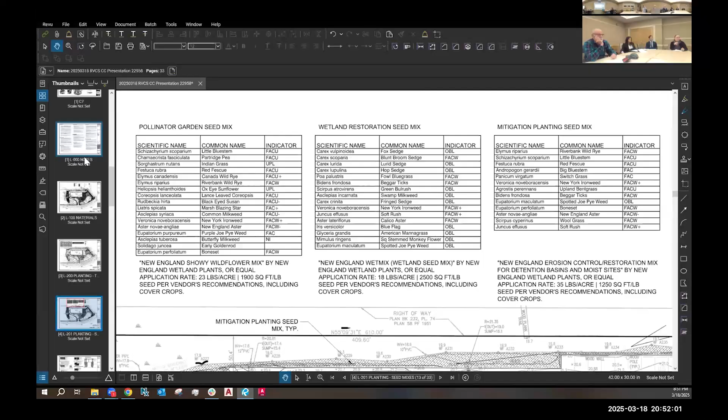Would you like me to go back to the first page, Katie? Yeah, actually, I remember what they were. We added a walkway connection between Perry Way and the walkway on the school site. This was a request from the planning department, so that people who park along Perry Way, particularly when school's not in session and they want to walk to the other schools or to the athletic fields, that gives them a safe passage to the crosswalk across Low Street.

And then lastly, Ryan mentioned earlier, but we're proposing informational signage along Perry Way to describe the wetlands and habitat and wildlife, so that people who would now park there can learn a bit more.

Where does the negotiation with the city on, the public use agreement, stand? Our board is meeting tomorrow night to discuss whether we want to accept the funds or not. What funds? Oh, CPA, I'm sorry. Yeah, so the Community Preservation Act funds.

Yes, Director Hughes hasn't had time to meet with her board yet following the CPC meeting, and they have to decide whether or not to accept them. They've recently learned from their insurer that it's not as straightforward as it seemed at the start.

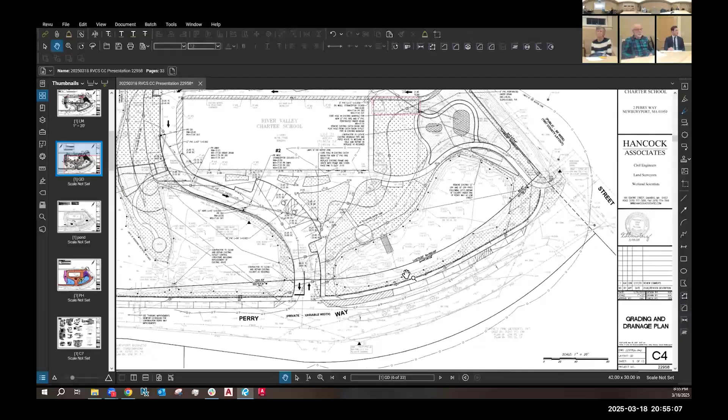I have a suggestion on the language in your variance request. You didn't mention any improvement in the safety for the students, and it seems to me that's one of the key elements of the project, that it improves the safety conditions, particularly with regard to traffic flow. I feel like that would be helpful in terms of justifying a public benefit. When I look at this project as a whole, that's the first thing that comes to my mind, an improvement in safety and traffic flow for the school, but the safety part, I think, would help the language in a variance request.

Yeah, we appreciate that, and it depends on the commission's view of the public interest as well. This obviously massively benefits the school in terms of the quality of the grounds, the educational opportunities, the play opportunities, the health opportunities, and of course the safety too and improving traffic flow. It's not necessarily a benefit to the public at large because it's more to the benefit of the school and its students. So we hadn't included that in our variance request, but if the commission views that as a public benefit, we'd be more than happy to expand on how the project overall benefits the students as a public benefit.

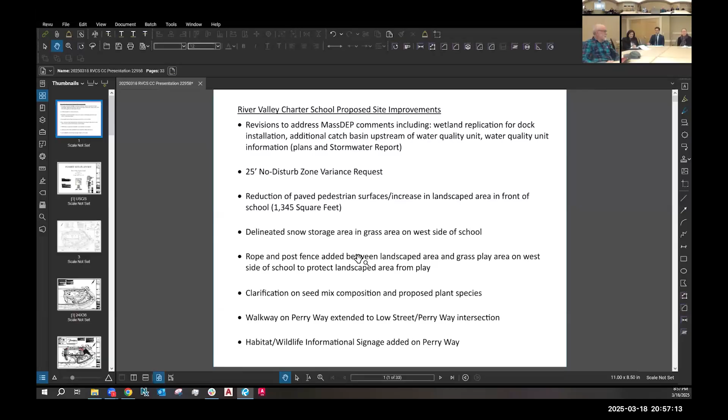It's a charter school, but it is a public school as well, so it might not be every kid who goes there, but it's not every kid in Newburyport who goes to the other schools either. I think that opinion counts as public benefit. Noted, yeah, we can update to reflect that as well.

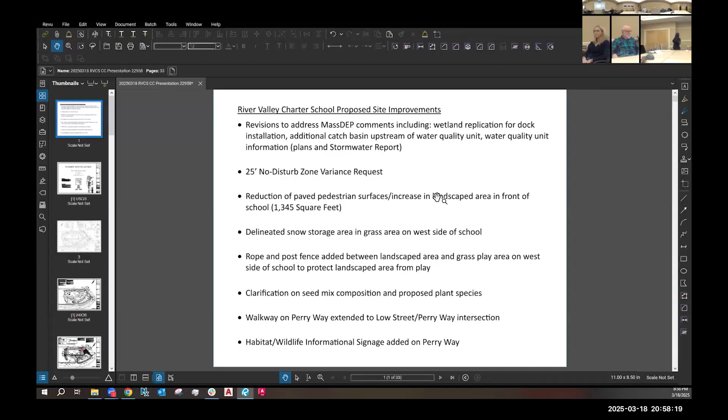I understand that, but it's flagged a wetland. Yeah, and that's a wetland, and I was actually wondering if it might get better with the wall there, actually separating it from the pavement better. Over time it might get better, certainly curbing will help. Yeah, I mean, there's nothing there now. It's just, you know, tight there, there's so much.

And they need to make decisions because the community preservation money is contingent upon an agreement. And it sounds like their insurance company doesn't like an agreement for some reason. They also need a lot more money. Well, they are an insurance company, that's...